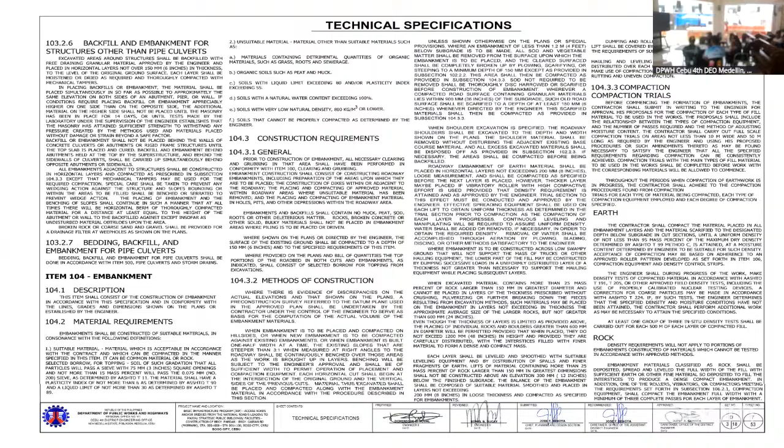Location plan, general notes and technical specifications, structural requirements, summary of quantities.

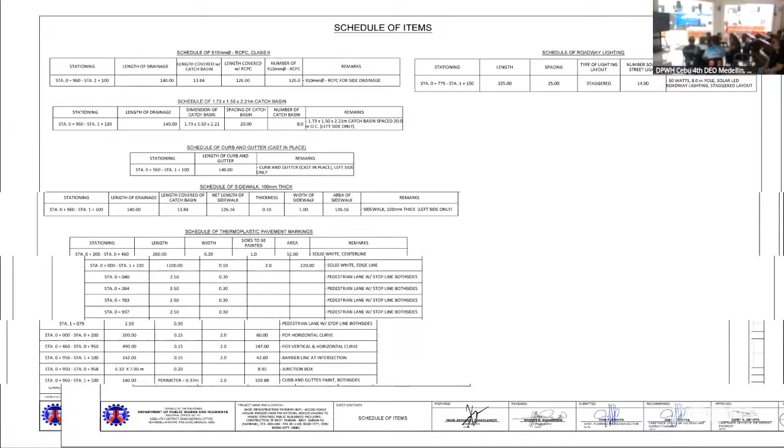Roadway technical section, super elevation details, vertical and horizontal curve details, schedule of items, plan profile, catch basin details, curb and gutter details, PCCP details, and detailed cross sections.

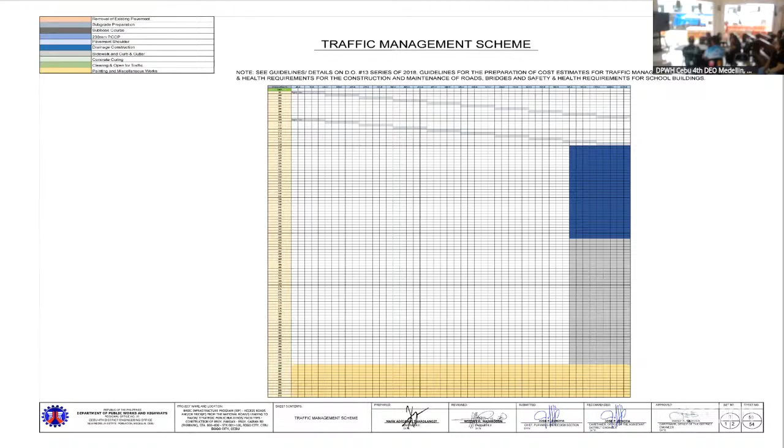Solar and lighting details. Traffic management layout, traffic management scheme. Waste disposal. Equipment requirements.

Low bed trailer, 1 unit. Two-way radio, 2 units. Barricade flasher light, 8 units. Backhoe, 1 unit. Dump truck, 10 cubic, 2 units. Payloader, 2 units. Bulldozer, 1 unit. Plate compactor, water truck, motorized road grader, and vibratory roller, 1 unit. Concrete vibrator, 2 units.

Concrete spreader, concrete saw, bar cutter, joint crack sealer machine, bar bender, cargo truck, 1 bagger mixer, cargo truck 2 to 5 metric tons, 1 unit, applicator machine, 1 unit, heating machine, truck mounted crane, 1 unit, straight boom lift, 1 unit.

For project profile number 2, to be presented by Engineer Rina D. Hadjero.

Contract ID number 26HG0060. Project: access roads and bridges on the national roads related to major strategic buildings and facilities. Construction of road, Barangay Bungtod, Sitio Tabayjo, Barangay Dakit. Section 1, Station 00+250 to Station 00+305. Section 2, Station 0+000 to 00+120, City of Bogo. Funding source, CY 2026 GAA.

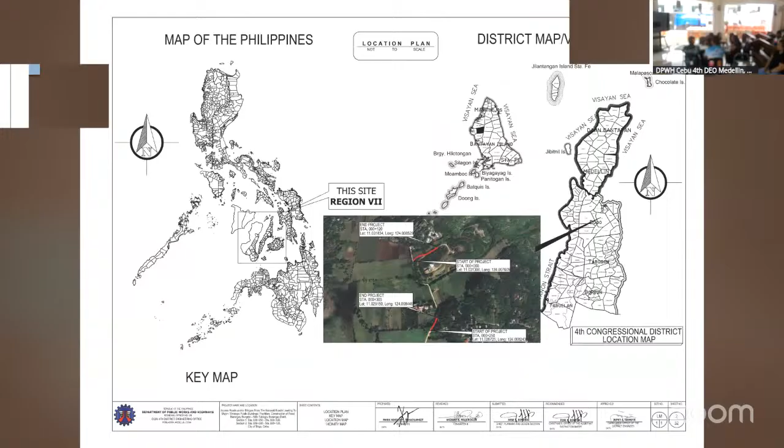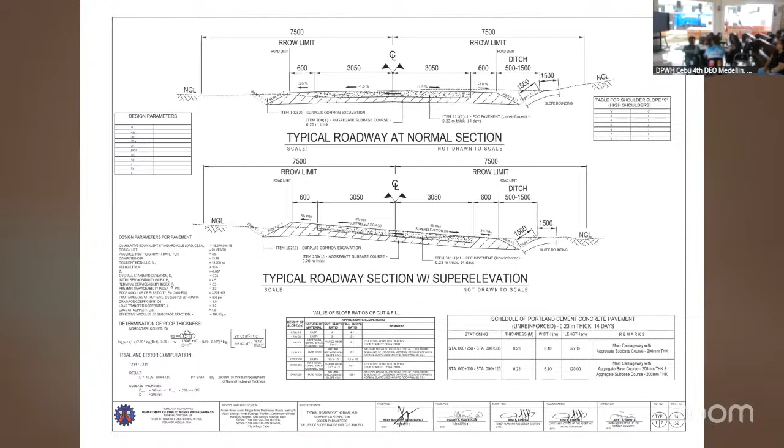Summary of quantities. General notes. Technical specifications. Typical roadway. Detail of catch basin. Details of street light. Super elevation.

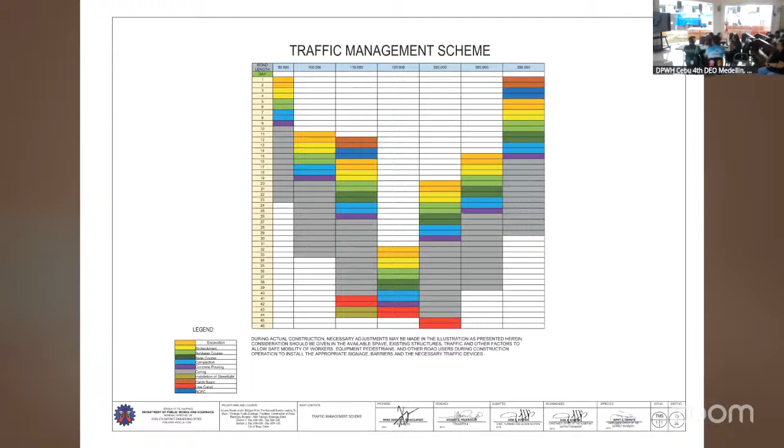Traffic management layout. Traffic management scheme. Plan and profile for station 00+250 to station 00+305. Plan and detailed cross-section. Straight line diagram.

Equipment requirements. Prime mover with low bed trailer, applicator machine, backhoe, rail-mounted backhoe HDA 23, backhoe with breaker, bar cutter 32 mm diameter single phase, bar cutter 16 mm diameter single phase, bar cutter 13 mm diameter single phase, bulldozer with ripper, cargo truck 9 to 10, cargo truck 2 to 5. Concrete saw, concrete spreader, concrete vibrator, dump truck, joint crack sealer machine, heating machine, motorized road grader, one bagger mixer, payloader, vibratory roller, water truck, pump.

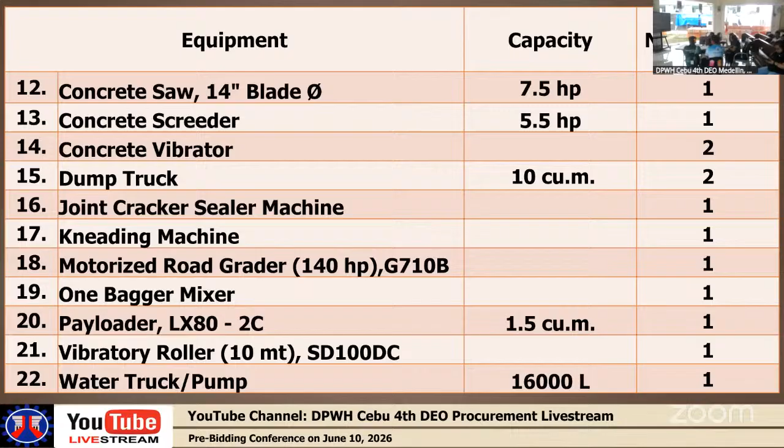For project profile number 3, to be presented by Engineer Rachel of the DPWH.

Proposal item number 26HG0061. Project B, Basic Infrastructure Program BIP. Access roads and bridges to the national roads leading to major strategic public buildings or facilities. Construction of Barangay, Sitio Gangpal Road, Station 000 to Station 001+760, Bogo City.

Funding source is CY 2026. Approved budget for the contract is 47,225,000. Dimension is 8.52. Brief description, construction of road. Contract duration is 212 days.

Summary of quantities. Part B, other general requirements. Part C, earthwork. Part D, sub-base and base course. Part E, surface courses. Part G, drainage and slope protection structures. Part H, miscellaneous structures.

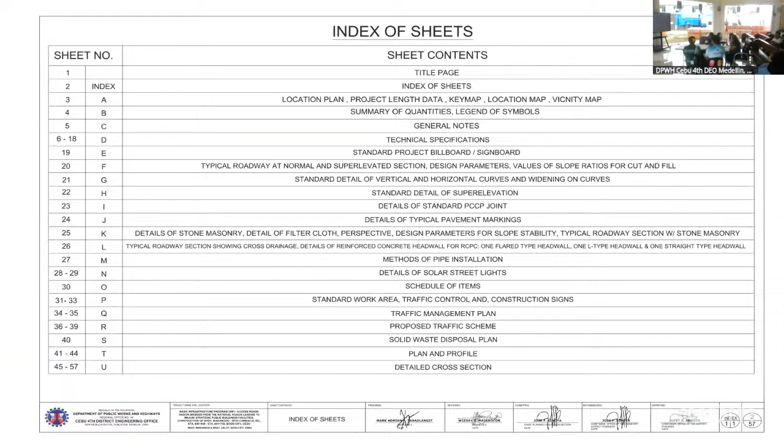Index of sheets. Location plan. Summary of quantities. General notes, technical specifications, and construction requirements.

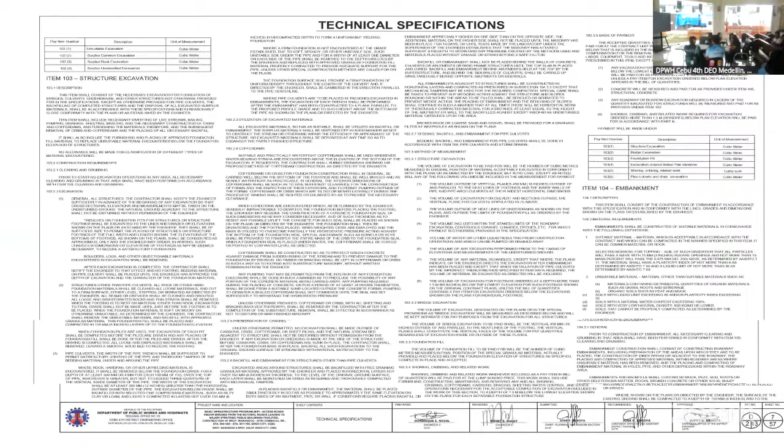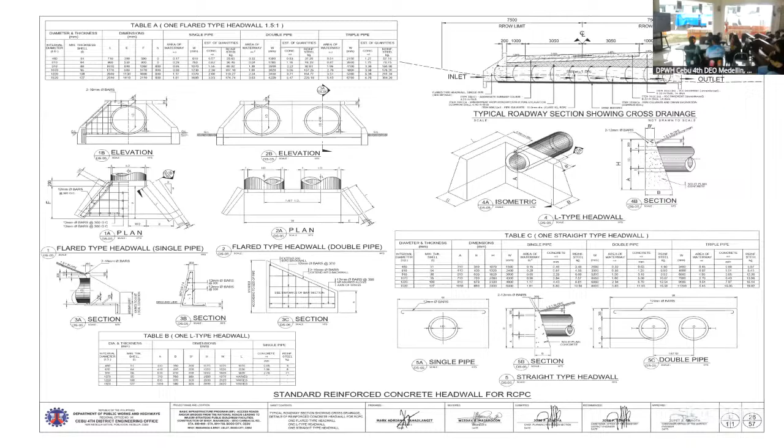Project overview. Typical roadway sections. Super elevation details. Typical PCC joint details. Thermoplastic details. Slope protection details. Pipe culvert details and head wall. Solar lighting details. And schedule of items.

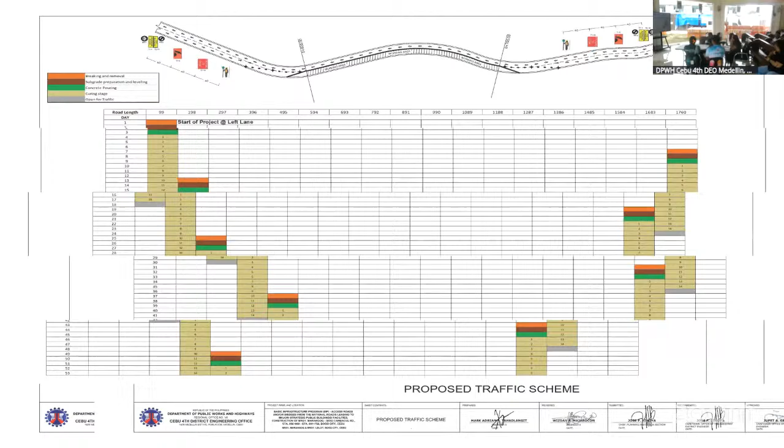Traffic management layout. Traffic management scheme. Waste disposal plan.

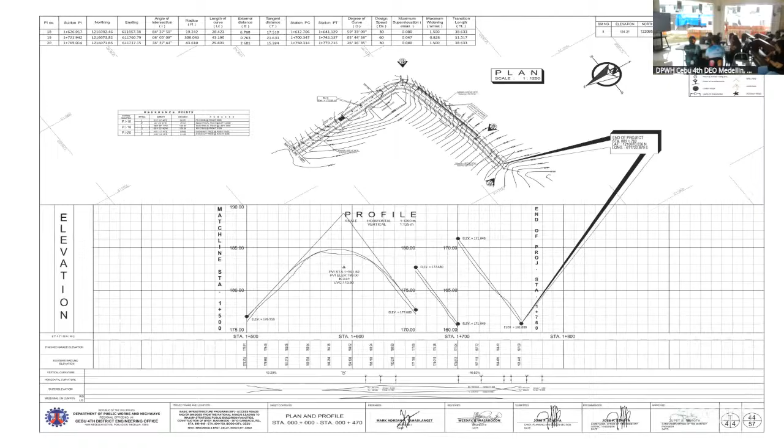The plan profile. Station 00 to Station 00+470. Plan profile of Station 470 to Station 470 to end of project. Detailed cross sections. Straight line diagram.

Equipment requirements. Two-way radio, 2 units. Barricade flasher light, 8 units. Low bed trailer, backhoe, dump truck, 2 units. Bar cutter grade 40, single phase, 1 unit. Bulldozer, 167 horsepower, 1 unit. Payloader, 1.50 cubic meter, 2 units. Motorized grader, vibratory roller, water truck, concrete vibrator, 2 units, concrete screeder, 1 unit.

Concrete saw, 7.5 horsepower, 1 unit. Bar cutter single phase, 1 unit. Joint crack sealer machine. Bar bender for 16 mm diameter, 1 unit. Cargo truck, 9 to 10 metric ton, 1 unit. One bagger mixer, 1 unit. Bar cutter grade 40, 16 mm diameter, 1 unit. Plate compactor, 5 horsepower, 1 unit. Backhoe type, 1 unit. Cargo truck, 2 to 5 metric ton, 1 unit. Applicator machine and kneading machine, 1.

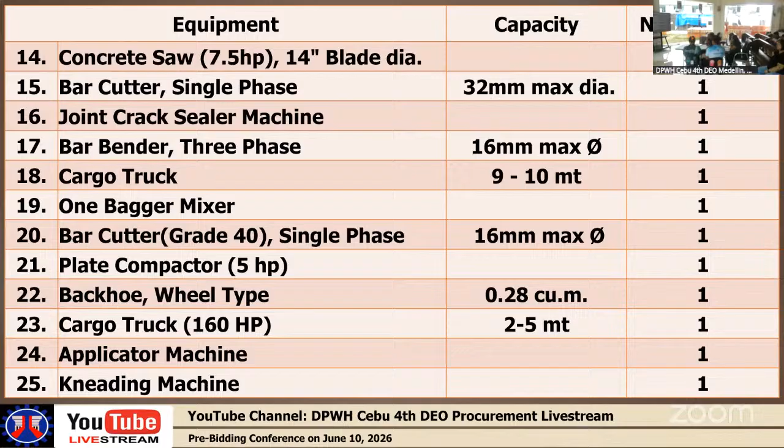For project profile number 4, to be presented by Engineer Jose Binuya.

Summary of quantities. Part B, other general requirements. Part C, earthwork. Part D, sub-base and base course. Part E, surface courses. Part G, drainage and slope protection structures. Part H, miscellaneous structures.

A summary of quantities. Typical roadway sections. Super elevation details, horizontal and vertical curve details, schedule of items, plan and profile from station 00 to station 500, and plan and profile of station 500 to station 817.

The detailed cross sections, pavement marking details, the traffic management plan, traffic management scheme, and the traffic control and construction signages.

Project billboard, the waste disposal plan, the straight line diagram.

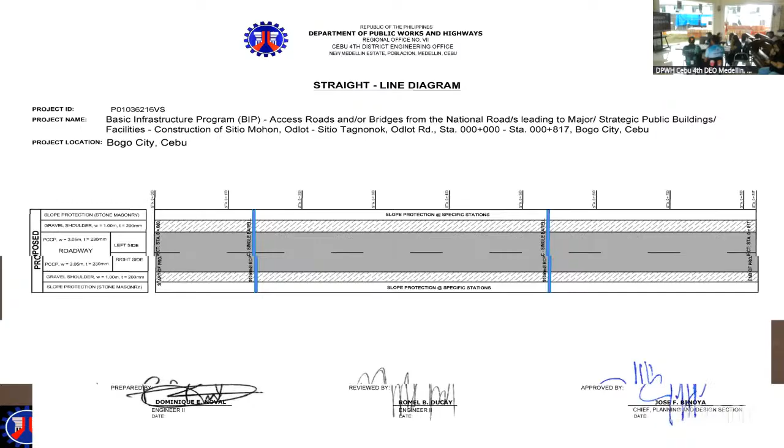For project profile number 5 to be presented by Engineer Organ.

Contract ID number 26HG0063. Project: Sustainable infrastructure projects, alleviating gaps or SIPAG. Access roads and/or bridges from the national roads leading to major strategic public buildings and facilities. Construction of road from Sitio Bangkal, Barangay Poblacion Station 00 to Station 00 plus 524, Station 00 to Station 00 plus 163, Station 00 to Station 00140, Station 00 to Station 00225, San Remigio. Funding source fiscal year 2026 GAA approved budget for the contract: 28,488,600 pesos.

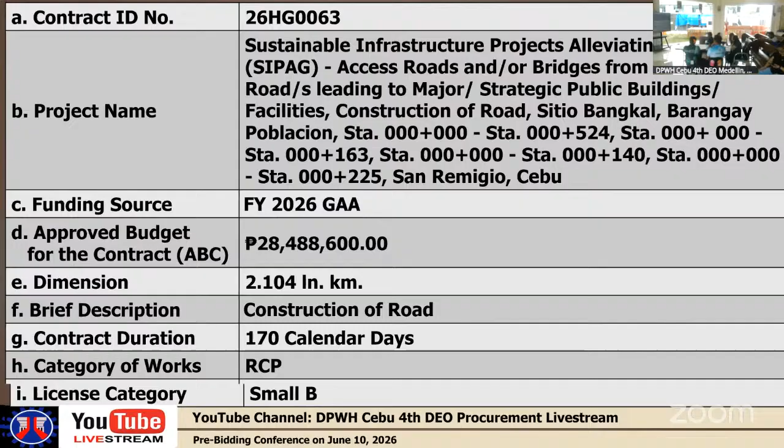Category of works are discussed in the details by array of quantities: Part C, earthwork. Part D, sub-base and base course. Part E, surface courses. Part G, drainage and slope protection structure. Part H, miscellaneous structure.

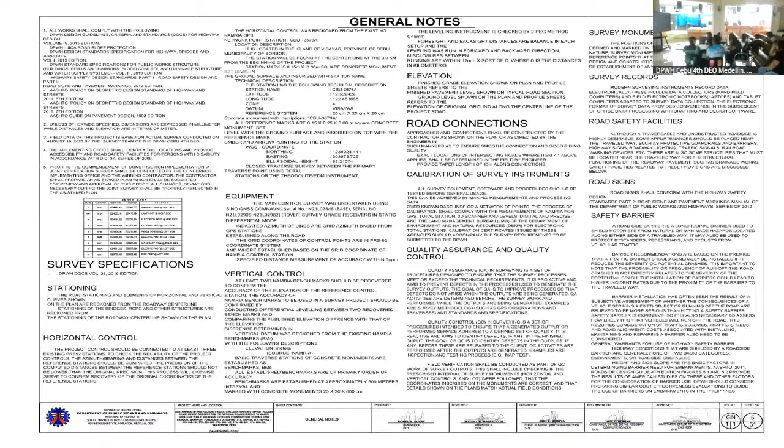Drawings: First page is the title page. Second page is the index of sheets. Third page is the location plan, key map, location map, and vicinity map. Next page is the summary of quantities and legend of symbols. Next page is general notes. The following pages are the technical specifications.

Schedule of items. Next page is the standard project billboard. Next page is the typical roadway section. Next page is the standard detail of vertical and horizontal curves and widening curves. Next page is standard detail of super elevation.

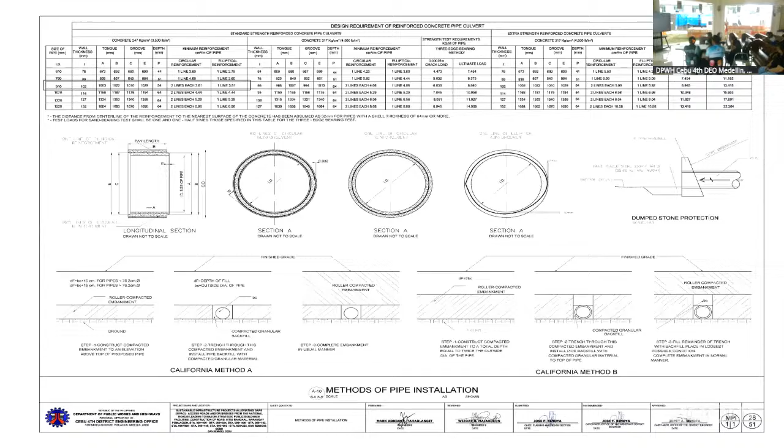Next page is detail of standard expansion joint. Next page is details of the typical pavement markings. Next page is the details of stone masonry. Next page is the standard reinforced concrete head wall for RCPC. Next page is the method of pipe installation.

Next page is the typical roadway section showing lined canal on left side and details of lined canal with cover. Details of solar street lights. Traffic management layout. Traffic management scheme.

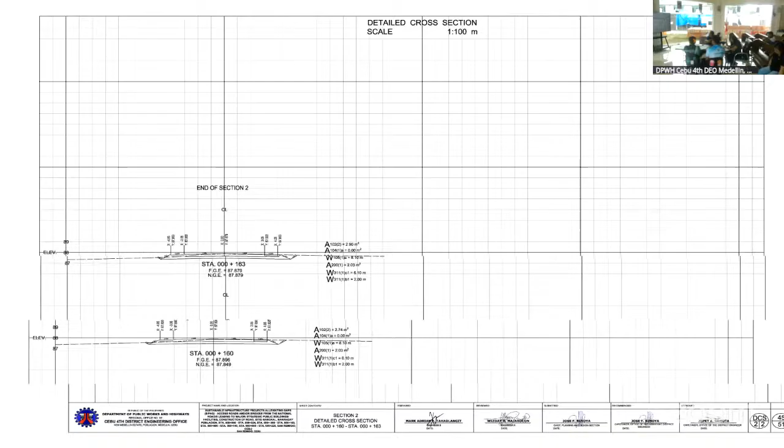Plan and profile of section 3, station 0 to station 140. Detailed cross-section of section 3. Plan and profile of section 4, station 0 to station 0 plus 225. Detailed cross-section of section 4.

Straight line diagram. Equipment requirements: 2 units of two-way radio, 8 units of barricade flasher light, 1 unit of low bed trailer, 1 unit of backhoe.

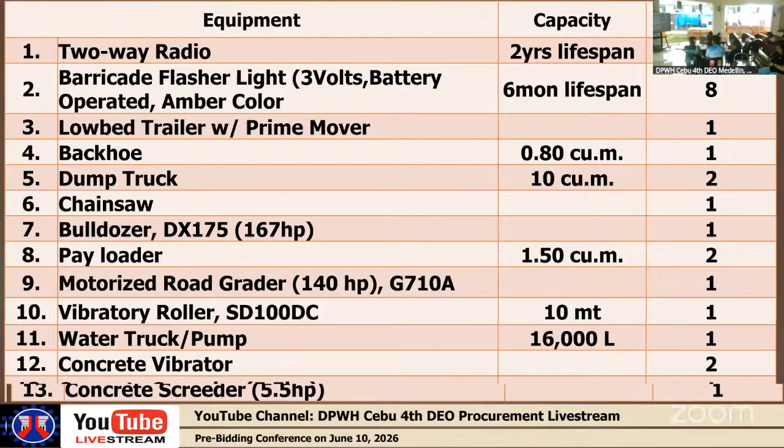2 units of dump truck, 1 unit of chainsaw, 1 unit of bulldozer, 2 units of payloader, 1 unit of motorized road grader, 1 unit vibratory roller, 1 unit water truck, 2 units concrete vibrator, 1 unit concrete screeder, 1 unit concrete saw, 1 unit bar cutter, 1 unit joint crack sealer machine, 1 unit bar bender.

1 unit cargo truck, 1 unit one-bagger mixer, 8 units bar cutter, 1 unit plate compactor, 1 unit backhoe wheel type, 1 unit cargo truck, 1 unit applicator machine, 1 unit kneading machine.

Project number 6 to be presented by Engineer Senator.

Contract item number 26HG0064. Project name: SIPAG Access Roads and Bridges from the National Roads leading to major strategic public building facilities. Construction of road at HA2, Station 00 to Station 1 plus 246, Bogo City. Funding source fiscal year 2026 GAA approved budget for the contract: 29,700,000 pesos. Dimension: 2.492 kilometer. Brief description: construction of road.

Contract duration 185 calendar days. Category of works RCP. License category small medium. To be presented in details by Engineer Athena.

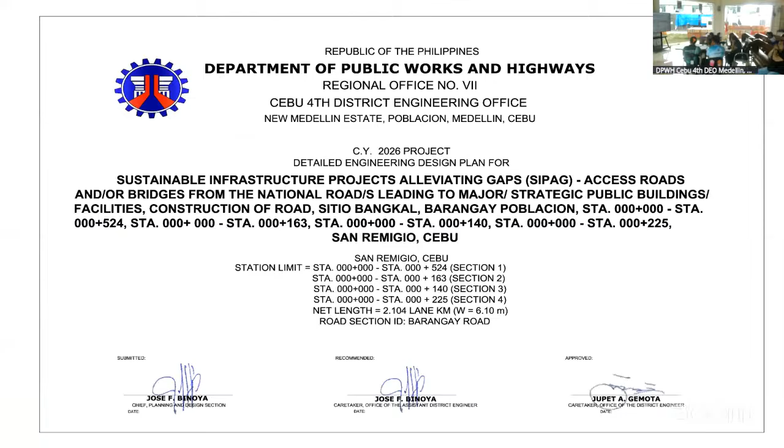Drawings: the title page, next is the index of sheets. Next is the location map, the key map, and the vicinity map. This is the summary of quantities and the legend of symbols. Next is the general notes. And the following pages are the technical specifications and the construction requirements.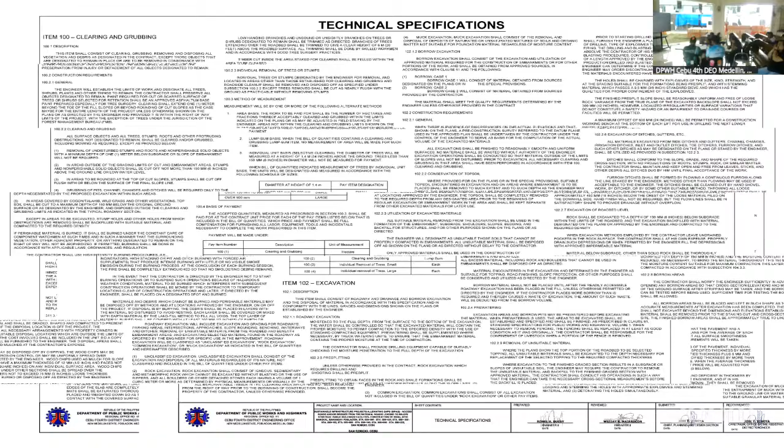This one is the schedule of items. Next is the standard project billboard and/or signboard. And this is the typical roadway at normal section and typical roadway section with super elevation.

This is the standard detail of vertical and horizontal curves and widening of curves. The standard detail of super elevation. The details of standard pavement. The details of typical pavement markings.

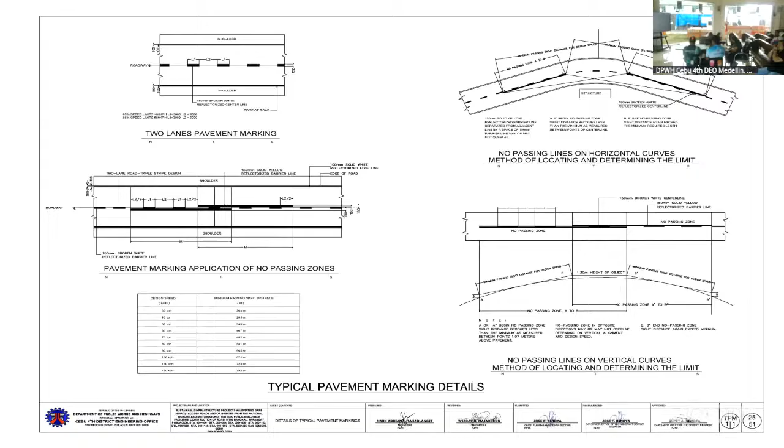This is the details of the stone masonry as well as the typical roadway section showing stone masonry. Next is the standard reinforced concrete head wall for RCPC. Next is the methods of pipe installation.

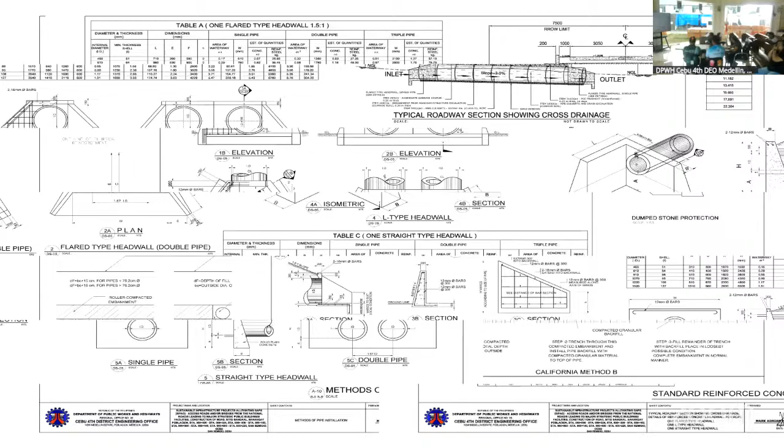This one is the typical roadway section showing line canal on the left side. This is the details of solar street lights. This is the standard work area, traffic control, and construction signs.

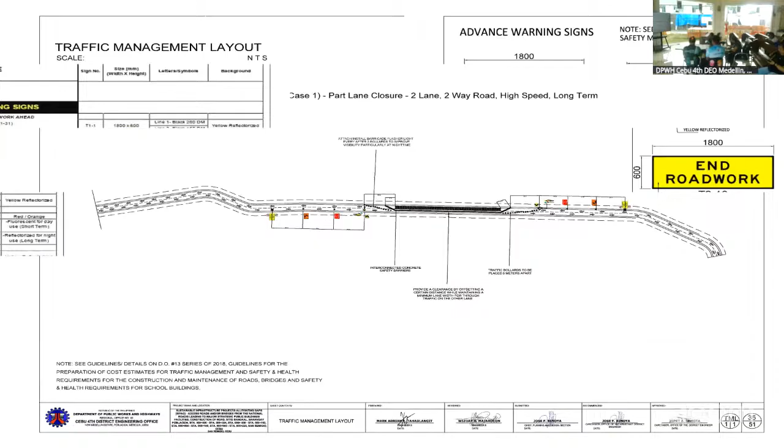This is the traffic management layout. The proposed traffic scheme. The solid waste disposal plan. And this is the plan profile. As well as the detailed cross section.

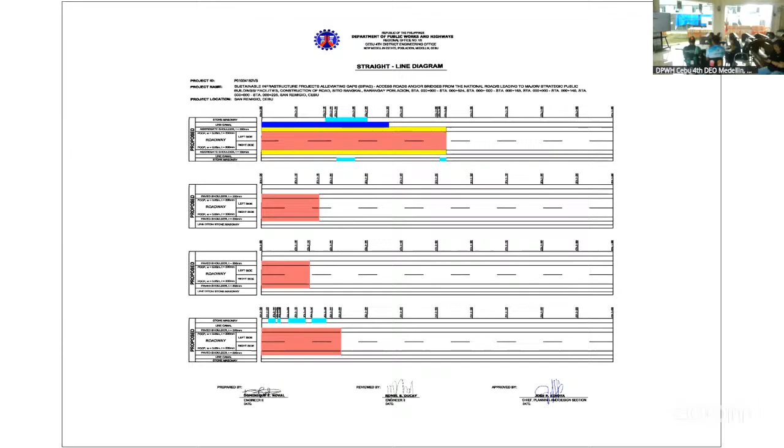And this is the straight line diagram. Equipment requirements.

1 unit of the following: lower bed trailer with prime mover, backhoe, payloader, motorized road grader, vibratory roller, plate compactor, 8 units of concrete vibrator, 1 unit of the following: concrete scraper, concrete saw, bar cutter 32 mm max rebar diameter single phase, joint cracker sealer machine.

1 unit of the following: 1 bagger mixer, applicator machine, kneading machine, backhoe wheel type, 2 units of dump truck, 1 unit of water truck or pump, 1 unit of cargo truck, 1 unit of chainsaw, 1 unit of bulldozer, 1 unit of bar cutter 30 mm max rebar diameter single phase, 1 unit of bar bender 13 mm max rebar diameter 3 phase.

For project profile number 7, to be presented by Engineer Rina D. Angelo.

Contract ID number 26HG0065, project name, basic infrastructure program, BIP, access roads and/or bridges from the national roads leading to major strategic public buildings and facilities. Construction of Lapaz-Sitio Sambag, Malingin Road, Station 000+000 to 000+880, Bogo City Cebu. Funding source, FY 2026, approved budget for the contract, 20,047,500. Dimension, 1.716 linear kilometer.

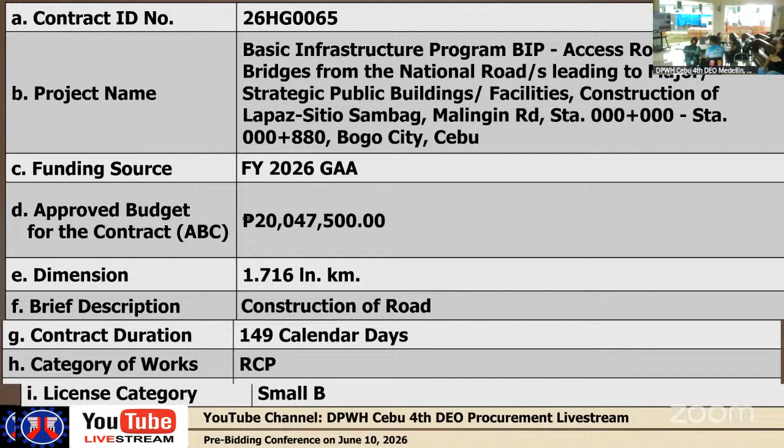Summary of quantities. Part B, other general requirements. Part C, earthwork. Part D, sub-base and base course. Part E, surface courses. Part G, drainage and slope protection structures. Part H, miscellaneous structures.

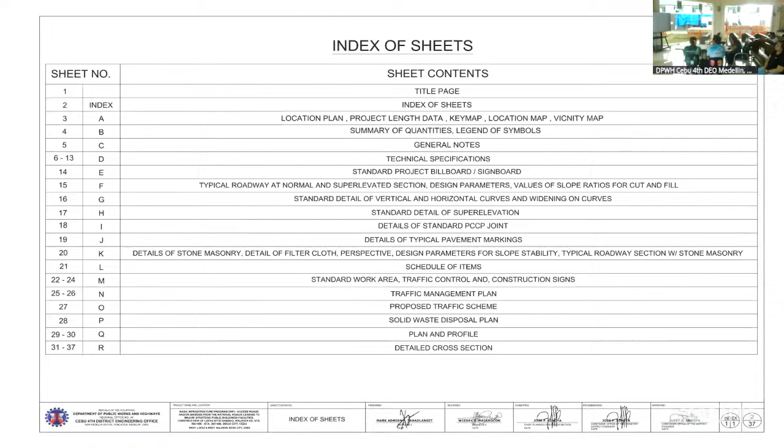Drawings. This is the title page. The index of sheets. The location map. The summary of quantities and the legend of symbols. The general notes. And the technical specifications.

Next is the standard project billboard or signboard. Next is the typical roadway at normal and superelevated section, design parameters, and the values of slope ratios for cut and fill.

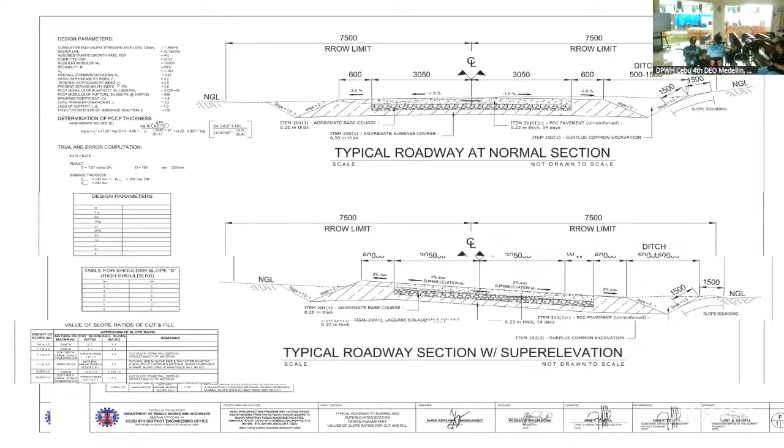Next is the standard detail of vertical and horizontal curves and widening wind curves. Next is the standard detail of super elevation. The details of standard basic joint. The details of typical pavement markings.

The details of stone masonry. The schedule of items. The standard work area, traffic control and construction signs.

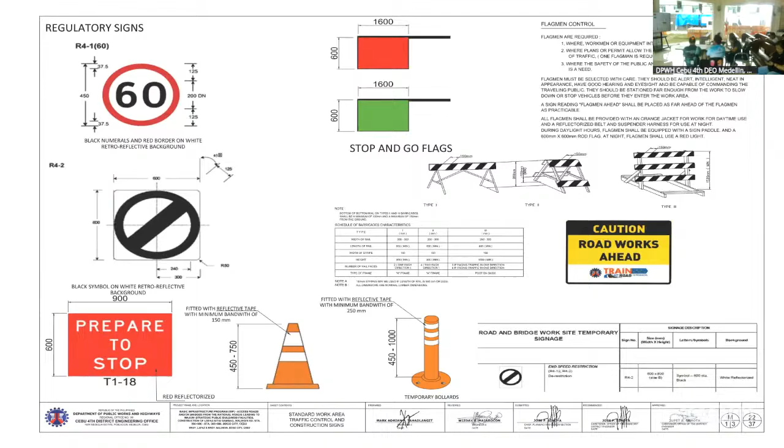Next is the traffic management plan. And this is the proposed traffic scheme. This is the solid waste disposal plan. And this is the plan and profile. This is the detailed cross-section.

And this is the straight line diagram. Equipment requirements: 2 units of two-way radio, 8 units of barricade flasher light, 3 volts, battery operated, amber color.

1 unit of low bed trailer with prime mover. 1 unit of bulldozer DX175, 167 HP. 2 units of payloader. 2 units of dump truck. 1 unit of motorized road grader, vibratory roller, and water truck or pump.

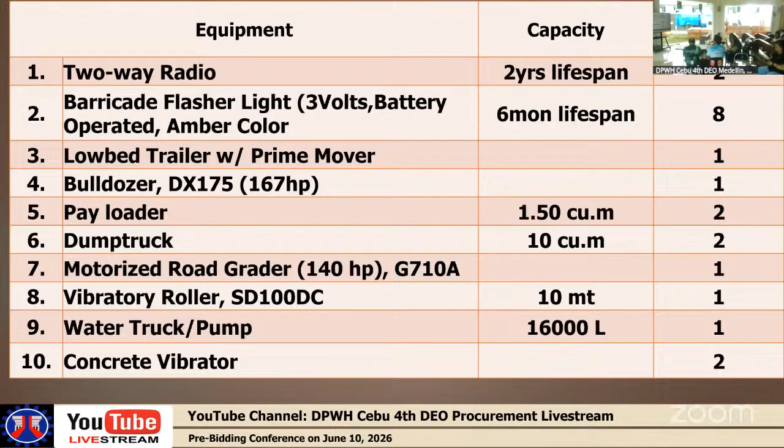2 units of concrete vibrator. 1 unit of the following: concrete scraper, concrete saw, bar cutter 32 mm diameter single phase, joint rack sealer machine, 1 bagger mixer, backhoe wheel type, cargo truck, applicator machine, kneading machine.

26HG0066. Project name: Construction of the Public Health Facility, Barangay Health Center, Barangay Baigad, Bantayan, Cebu. Funding source: Fiscal Year 2026 GAA. Approved budget for the contract: 4,950,000 pesos. Dimension: 2-story. Brief description: construction of the public health facility, Barangay Health Center.

Contract duration: 60 calendar days. Category of roads: PIC, WOPIC. License category: 1B. Will be presented in details of project and operating status.

Summary of quantities. Part B, other general requirements. Part C, earthwork. Part D, plain and reinforced concrete works. Part E, finishing. Part F, plumbing works. Part G, electrical works. Part H, miscellaneous structures.

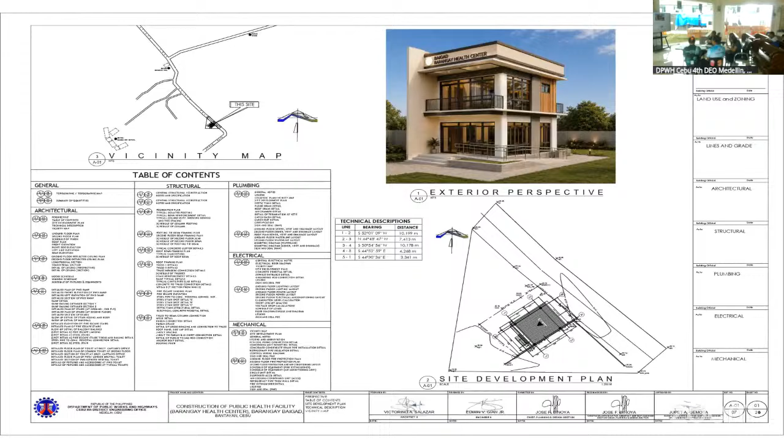Drawings: title page, table of contents, vicinity map, exterior perspective, site development plan, topographic map, summary of quantities, ground floor plan, second floor plan, roof plan, front elevation, right side elevation, left side elevation, rear elevation.

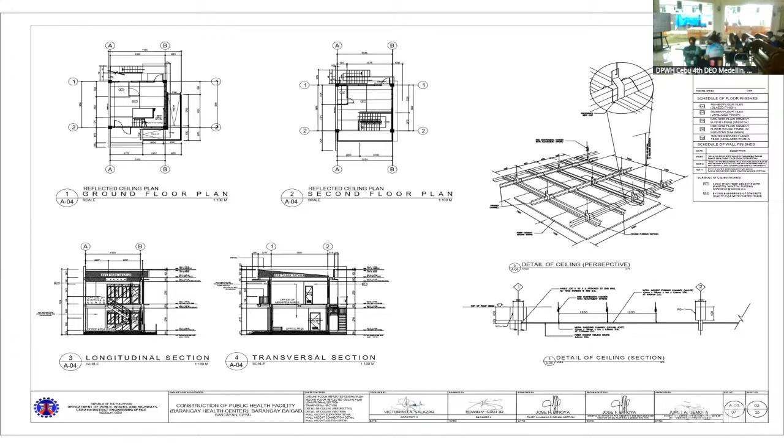Reflected ceiling plans, longitudinal section, transversal section, detail of ceilings, perspective and section, schedule of doors and windows, schedule of fixtures and equipment.

Detailed front elevation of grounds, ramp details, sections of PWD ramp, detailed plan of PWD ramp, detailed plan of stairs, section of stairs, blow-up detail of staircase, blow-up detail of handrail, detailed elevation of fire escape stairs, fire escape landing detail, blow-up detail of balcony railings, detail of fire escape stairs.

Detailed floor plan of toilet at second floor, detailed section of second toilet at second floor, details, pictures, and accessories at typical toilet.

General construction notes. Foundation plan, typical isolated footing, schedule of holding column, typical beam reinforcement detail, typical column elevation showing dowels and tie spacing, footing tie beam framing plan, schedule of second floor slab, schedule of roof beam, schedule of footing tie beam, second floor beam framing plan.

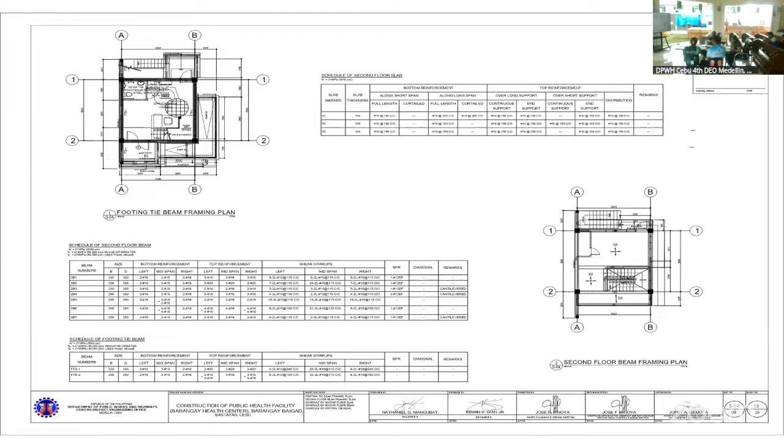Typical concrete gutter details, roof beam framing plan, typical slab details and installation, schedule of roof beam, roof framing plan, truss details, truss member connection details, schedule of concrete.

Truss to concrete connection details, typical cantilever slab details, stair reinforcement details, detailed elevation of fire escape, septic tank structural detail, steel stair details, concrete pedestal details, fire escape landing details, purlin connection details, and other connection details.

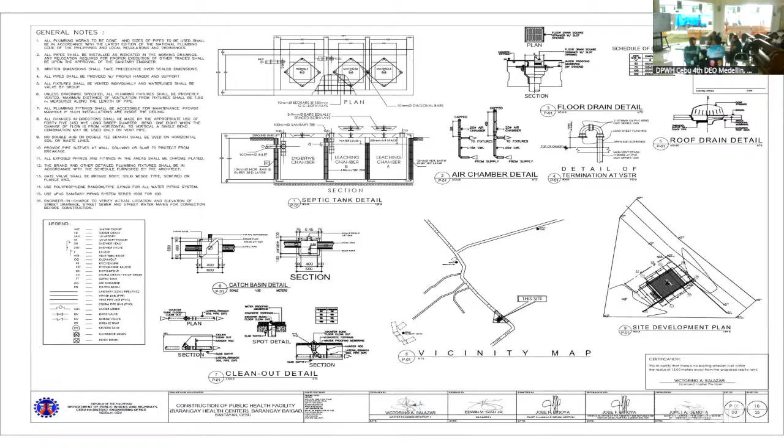General notes for plumbing, vicinity map, site development plan, catch basin detail, clean-out detail, floor drain detail, drain detail. Sewer line and drainage line layout for ground and second floor plan. Rainwater catchment tank details, water line layout for ground and second floor plan.

General electrical notes, concrete pedestal details, electrical riser diagram, service entrance details, ground rod connection details. Lighting layout for ground and second floor plan, schedule of loads, single line riser diagram, power layout for ground and second floor plan, and other computations.

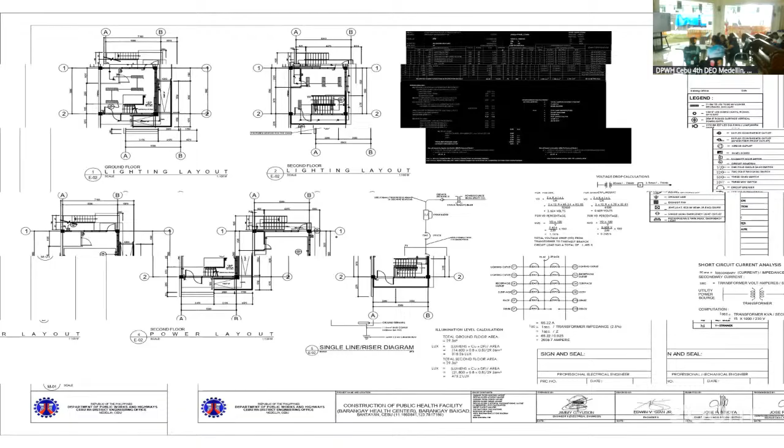General notes for mechanical, condensing unit mounting detail, refrigerant pipe insulation detail, FCU cooling coil piping connection details, and pipe insulation detail.

Fire protection plan for ground and second floor plan. Air conditioning layout for ground and second floor plan. Detailed unit for air conditioning and schedule of equipment, fire extinguisher details, and refrigerant pipe details.

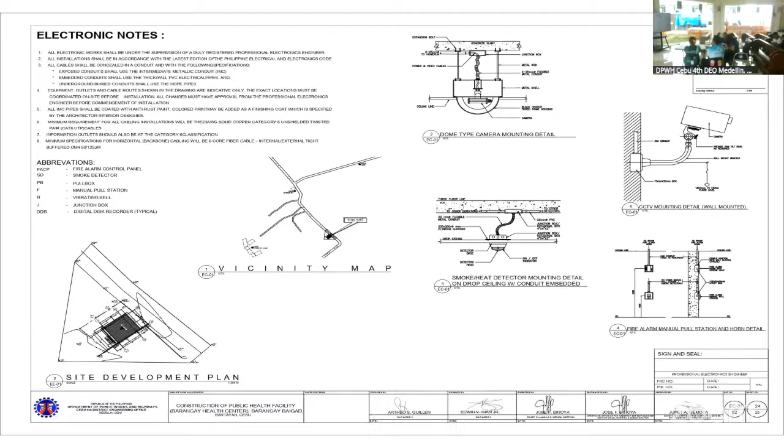Electrical notes, electronic notes. CCTV mounting detail, fire alarm manual pull station details, ground and second floor fire protection plan, CCTV single riser diagram, fire alarm system diagram, CCTV line diagram.

Equipment requirements: 1 unit of backhoe, 1 unit of dump truck, 1 unit of plate compactor, 1 unit of concrete vibrator, 1 unit of concrete mixer, 2 units of one-bagger mixer, 1 unit of bar cutter, 1 unit of bar bender, 2 units of welding machine, 1 unit of cutting outfit, 1 unit of truck mounted crane, 2 units of jackhammer.

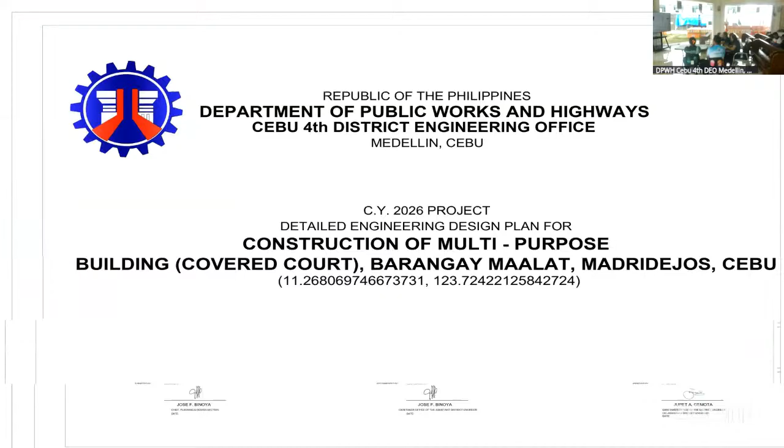Drawings: the title page and the exterior perspective, location map, vicinity map. Next is the site development plan. Next is the topographic map. The summary of quantities, the floor plan, the roof plan, the front, rear, right, and left side elevation, the section.

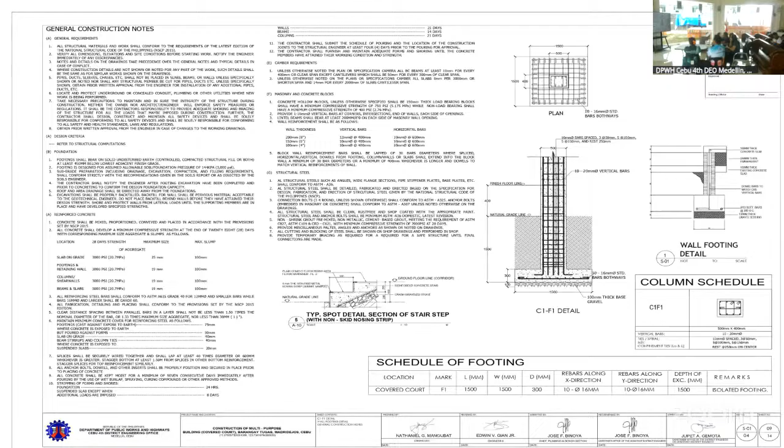Equipment requirements: 1 unit of backhoe, 1 unit of dump truck, 1 unit of plate compactor, 1 unit of concrete vibrator, 1 unit of concrete mixer, 2 units of one-bagger mixer, 1 unit of bar cutter, 1 unit of bar bender, 2 units of welding machine, 1 unit of cutting outfit, 1 unit of truck mounted crane, and 2 units of jackhammer.

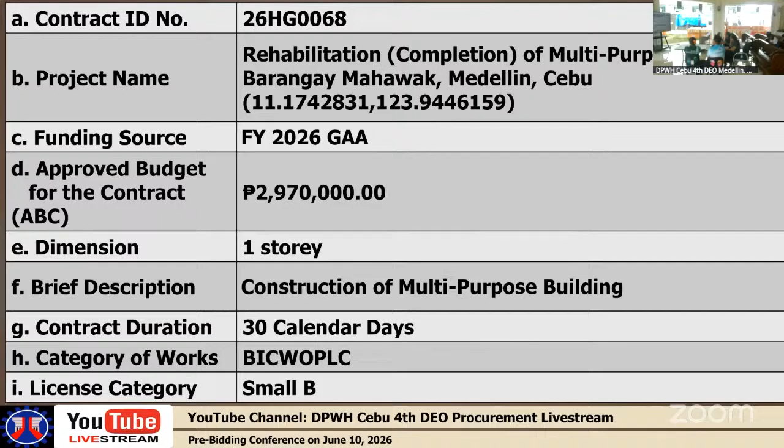Approved budget for the contract: 2,970,000. Dimension: one story. Brief description: construction of multi-purpose building. Contract duration 30 calendar days. Category of works: BICWOPLC, license small B.

To be discussed in detail again by Engineer Teresita.

Summary of quantities: Part B, other general requirements; Part C, earthwork; Part D, reinforced concrete works; Part E, finishing. Drawings. This is the combination of the cover, report, and...

The exterior perspective, vicinity map, site development plan. Next is the topographic map.

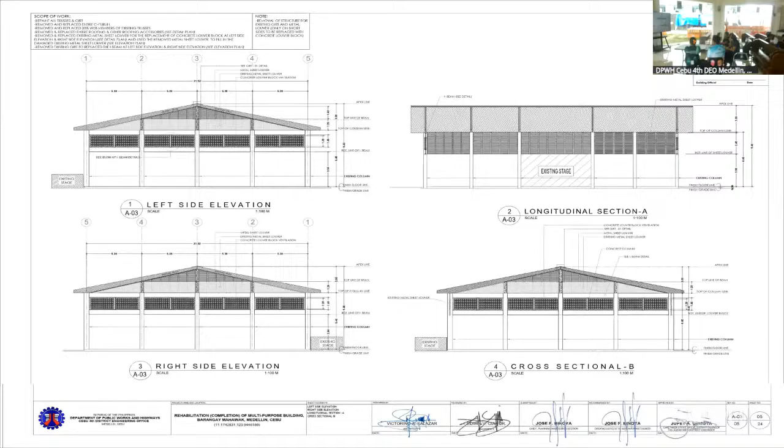The summary of quantities, the ground floor plan, front and rear elevations, left side, right side, and roof section, the blow-up I-beam detail, the roof plan.

Thank you. Project profile number 11, to be presented by Engineer Ruben B. Kayas.

Contract ID number 26HG0069. Project name: construction of multi-purpose building, Barangay Gairan, Bogo, Cebu.

The drawings. This is the new construction of multi-purpose building at Tabogon. Exterior perspective, the vicinity map, and the site development plan.

The topographic map, the summary of quantities, the ground floor plan, second floor plan, roof plan, and the front, right, left, and rear side elevations.

Next is the cross-sectional and the detail of ceiling, and the accent connection detail, and the wall accent elevation detail.

Next is the schedule of doors and windows.

Next is the details of railings, of ramps, detailed plan of PWD ramp, detailed plan of stairs, and the detailed section of stairs and of detailed counter.

Next is the detailed elevation of fire escape stairs, detailed plan of steel stair, and the fire escape landing and steel stair.

Next is the detailed section of toilet at Barangay Captain's office, detailed floor plan of common toilet at second floor, the details of fixtures and accessories at typical toilets, detailed plan of PWD/gender neutral toilet, and detailed section of PWD/gender neutral toilet.

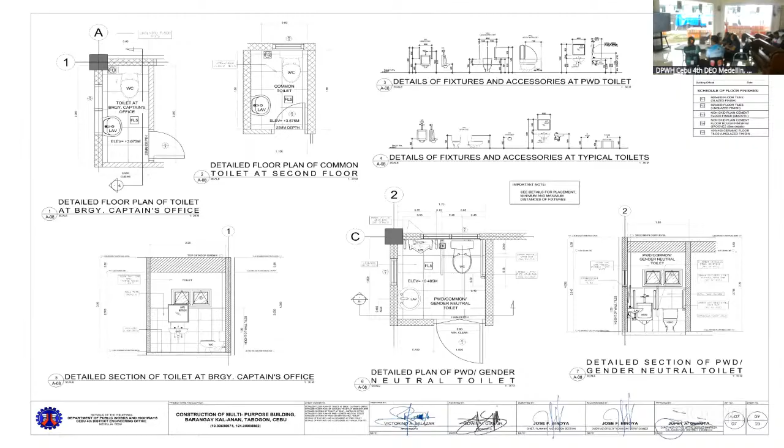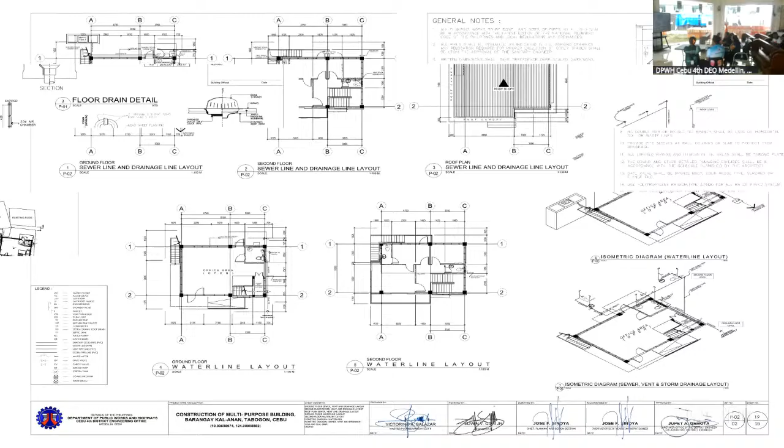Next is the general notes for plumbing, the sewer line and drainage layout, the sewer line and drainage layout for second floor, the water line layout for ground floor, and the water line layout for second floor.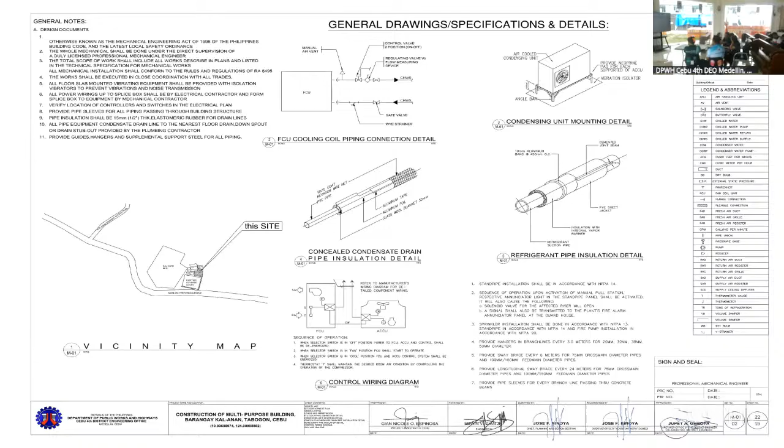Next, the general notes for mechanical works. The fire protection plan. Next, the air conditioning layout and the refrigerant data and the fire extinguisher detail.

Equipment requirements: 1 unit backhoe, 1 unit dump truck, 1 plate compactor, 1 concrete vibrator, 1 bar mixer, 1 bar cutter, and 1 bar bender, 3 units welding machine, 1 cutting outfit, and 1 truck mounted crane.

Project profile number 12, to be presented by Engineer Teresita I. Vizcarra.

Contract ID number 36HG007B. Project name: construction of multi-purpose building, Barangay Anonang Sur, City of Bogo, Cebu.

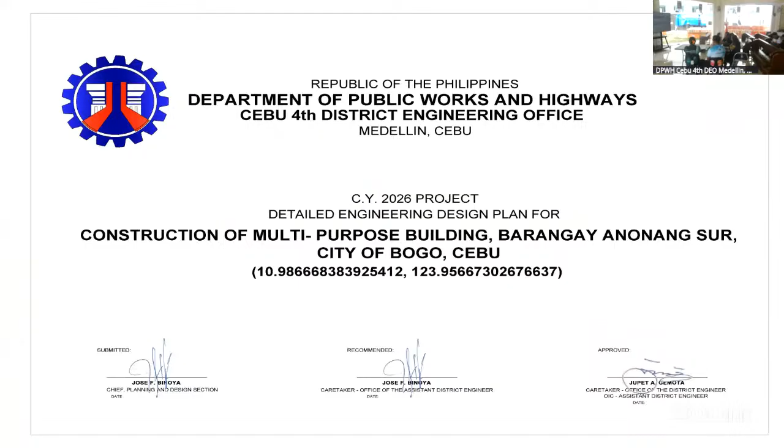Drawings. This is the new construction of multi-purpose building at Barangay Anonang Sur, Bogo City.

Exterior perspective, the vicinity map, site development plan. Next is the topographic map. The summary of quantities, the ground floor and second floor plan, roof plan, front, right side, left and rear side elevation. The ground floor plan for reflected ceiling plan and second floor plan for the reflected ceiling plan. Detail of ceiling and the cross section, wall accent elevation detail, and the wall accent connection detail.

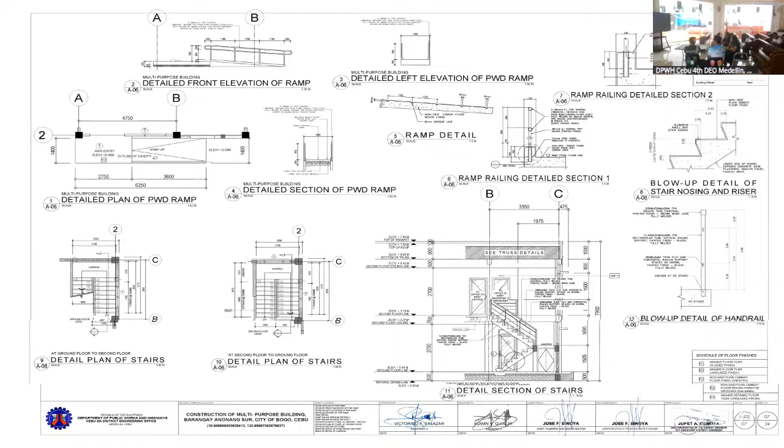Next is the blow-up schedule detail for toilets. Next is the general construction notes for structural. Next is the foundation plan, typical isolated footing, typical beam reinforcement details, and column details. Next is the footing tie beam framing plan, the second floor beam framing plan.

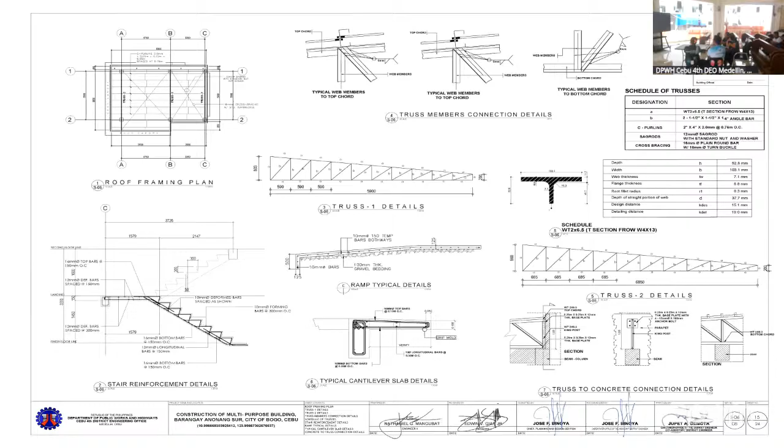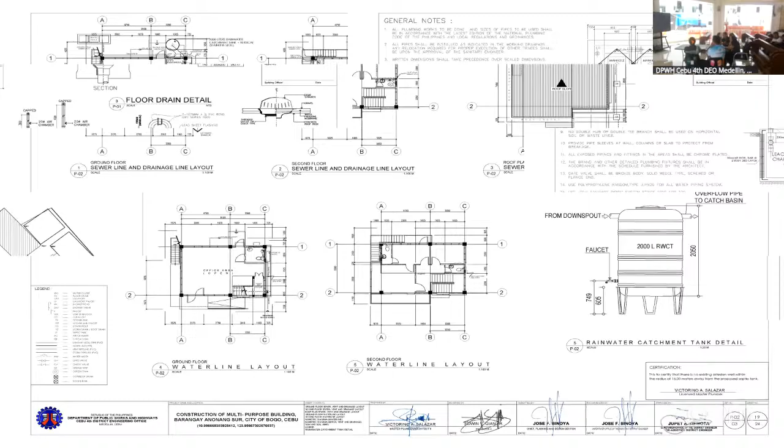Next is the general notes for plumbing, the septic tank detail, the clean-out detail. Next is the sewer line and drainage line layout for ground and second floor. The sewer line and drainage line layout for the roof plan, the water line layout for ground and second floor, and rainwater catchment tank detail.

Next is the isometric diagram. Next is the general electrical notes. The lighting layout for ground and second floor plan, the power layout of ground and second floor plan, and the computation of electrical.

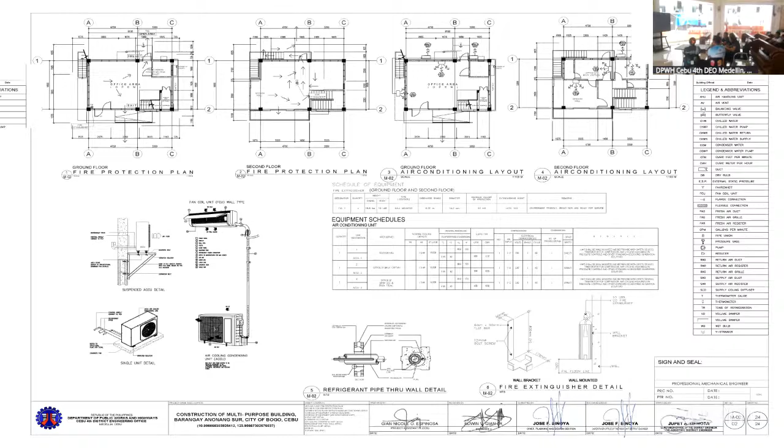Next is the general notes for mechanical works, the general drawings, specification and details. Next is the fire protection plan for ground and second floor, and the air conditioning layout for ground and second floor. The fire extinguisher detail. Equipment requirements.

1 unit backhoe, 1 dump truck, 1 plate compactor, 1 concrete vibrator, 1 power mixer, 1 bar cutter, 1 bar bender, 3 units of welding machine, 1 cutting outfit, 1 truck mounted crane.

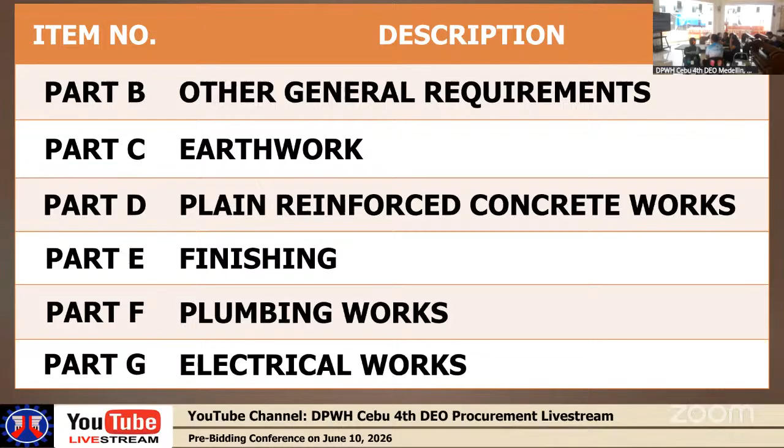Summary of quantities. Part B, other general requirements. Part C, earthwork. Part D, plain reinforced concrete works. Part E, finishing. Part F, plumbing works. Part G, electrical works. Drawings.

Title page. Perspective. Table of contents, vicinity map, and site development plan. Topographic map. Summary of quantities. Floor plan.

Elevations: front, rear, left side. Right side elevation. Longitudinal section. Cross section. Roof plan for the clubhouse. Floor finish layout plan. Reflected ceiling plan.

Elevation of clubhouse: front, left side. Rear elevation, right side elevation, cross section, longitudinal section, clubhouse schedule of doors and windows.

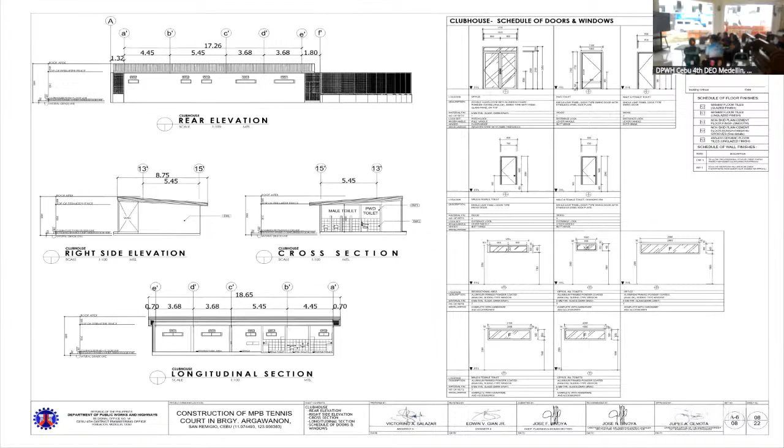Detailed plan of toilet, detailed plan of PWD toilet, details of fixtures and accessories of PWD toilet, detailed section of PWD toilet, typical perimeter fence details, ceiling detail, section and perspective.

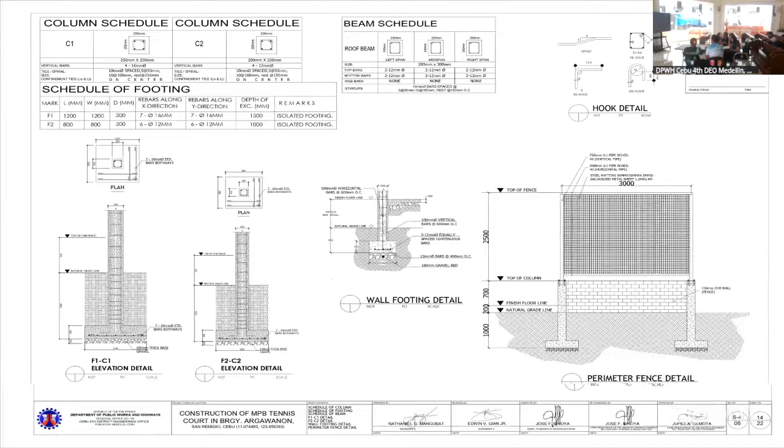Structural general construction notes, foundation plan, column schedule, beam schedule, schedule of footing, F1C1 elevation detail, wall footing, perimeter fence detail, hook detail, roof beam framing plan.

Steel connections, truss to beam or column connection. Foundation elevation, septic tank structural details, isometric connections for roofing, purlins, and other connections.

Plumbing notes, septic tank details, roof drain details, air chamber details. Sewer line and drainage layout, water line layout for clubhouse, catch basin detail, clean out detail.

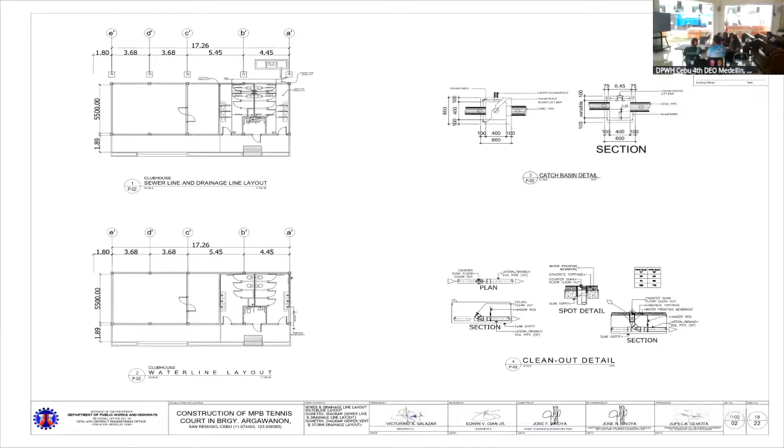General electrical notes, riser diagram, voltage drop calculation, concrete pedestal details. Schedule of loads, design analysis, short circuit current analysis, single line diagram, service entrance details, and grounding rod connection details.

Lighting layout plan, power layout plan. Equipment requirements: 1 backhoe, 1 unit dump truck, 1 unit plate compactor, 1 unit concrete vibrator, 1 unit pump crete, 2 units of 1 bagger mixer, 1 unit bar cutter, 1 unit bar bender, 2 units welding machine, 1 unit cutting outfit, 1 unit truck mounted crane, 2 units jackhammer. Thank you.

For the requirements for the key personnel of the aforementioned minimum projects, we require 1 personnel as project manager, accredited project engineer, accredited materials quality control engineer, and foreman, with 3 minimum years of experience in the same position and 5 minimum years of similar and related experience.

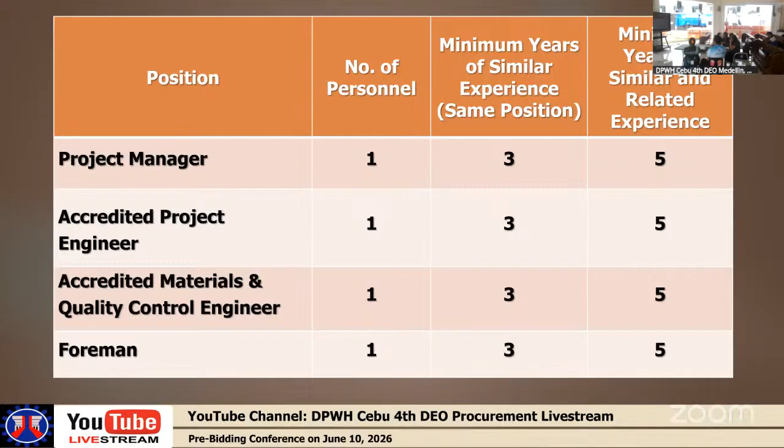For the plans and drawings, these projects are already downloadable and made available on the DPWH website.

For the Class A documents, these are the legal, technical, and financial documents. Legal documents are: number one, registration certificate; mayor's permit; number three, tax clearance.

For technical documents, still part of Class A documents, first is PCAB or special PCAB license in case of a joint venture, and in case of the valid special PCAB license, registration for the type and cost of the contract for this project as required. Second, records of all ongoing government and private contracts, including awarded but not yet started projects. Third, records of single largest completed contract, SLCC, similar to the contract to be bid.

For financial documents, still part of the Class A documents, are audited financial statement stamped received by the BIR or its duly accredited authorized institutions, and number two, an NFCC of at least equal to the ABC. This comprises the Class A documents.

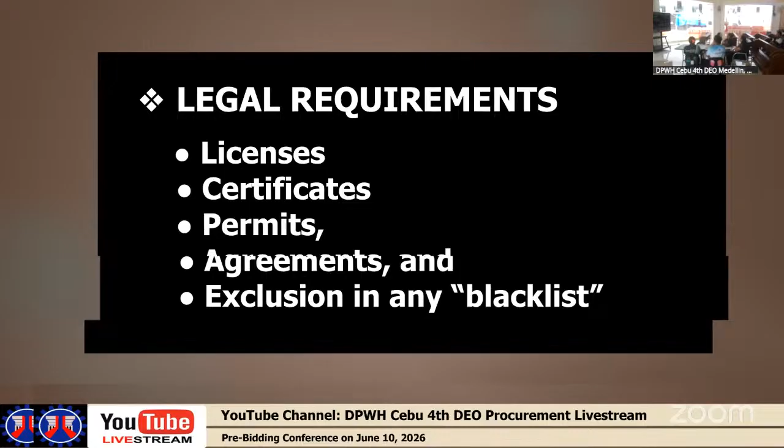Exceeding the ABC means disqualification. For the legal requirements: licenses, certificates, permits, agreements, and exclusion in any blacklist. For financial requirements: eligibility, price proposal, and NFCC. For technical requirements: key personnel availability, commitment of major construction equipment, performance in ongoing government and private contracts, and authenticity and correctness of the security.

The BAC, DPWH will verify, validate, and ascertain all statements made by and documents submitted by the bidder for the awarding of contract. The contract shall be awarded to the bidder whose bid has been determined to be the lowest calculated and responsible bid.

As a result of the bid evaluation and post-qualification conducted, contract awards shall be made within the bid validity period.

For questions and clarifications regarding the project, subject to pre-bid conference, bidders must get in contact with the BAC, quality assurance chief and chairman, or the engineering and procurement engineer at our office address.